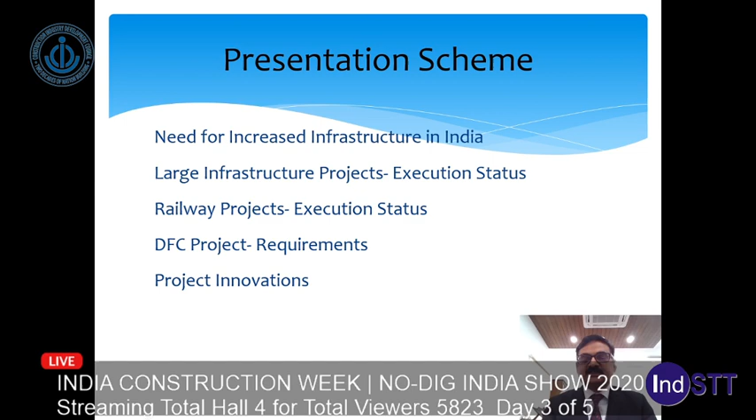This is the presentation scheme. First, what is the need of increased infrastructure in India. Then, how large infrastructure projects are executed in developed countries, focusing mainly on railway projects and their execution status. With this background, I'll focus on how DFC projects face the challenges of execution and what project innovations are being adopted in DFCCIL projects.

As we all know, the Indian economy is aspiring to become a 5 trillion US dollar economy by 2024-25. For that, the country needs to spend about 1.4 trillion US dollars on infrastructure. This spending will be done through different projects to bring these infrastructure projects into reality.

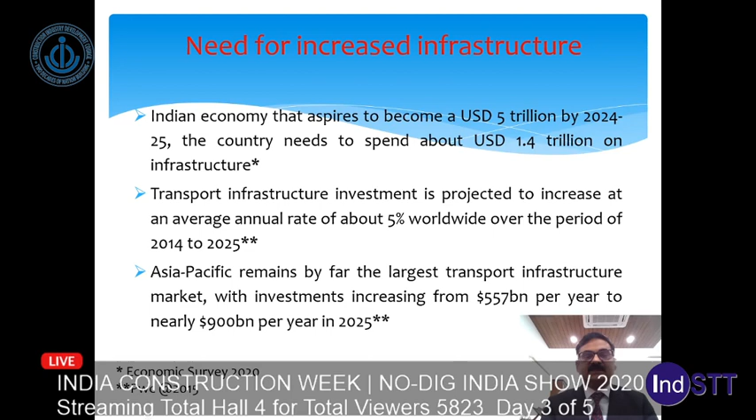What has been our experience with execution of large infrastructure projects? A study in 20 developed countries suggested that about 90% of projects have cost overruns. Another study of 44 urban rail projects suggested that average cost overrun is about 45%, and about one-fourth of projects have cost overruns of more than 60%.

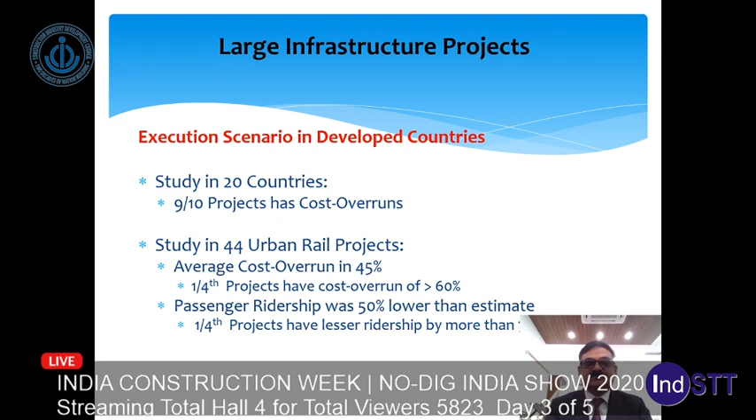In India, the situation is almost similar, especially for railway projects. As per an audit report of 2015, there has been delay in completion of projects resulting in cost overrun of over 1 lakh crores. During a period of 5 years, about 202 projects were added to the existing list, but only 67 were completed during this period, showing a huge pending list of projects waiting for completion.

How is that happening? One reason is the underutilization of funds or disproportionate allotment of funds, or ignoring the fund constraints.

In this India Construction Week presentation, I will focus mainly on the execution strategies which we as engineers can focus on to expedite project delivery and to meet the challenge of developing the huge infrastructure which the country is demanding.

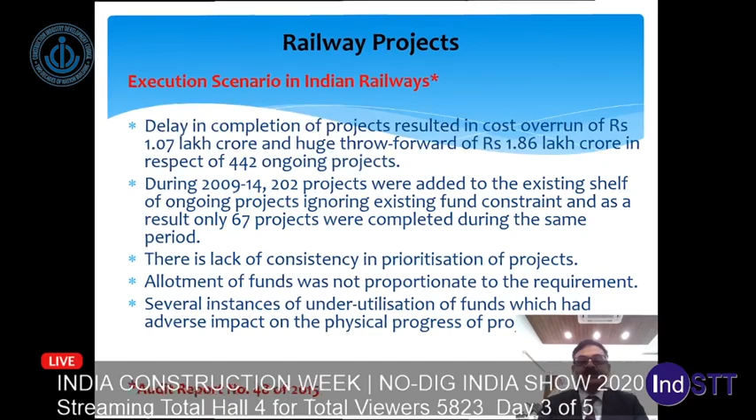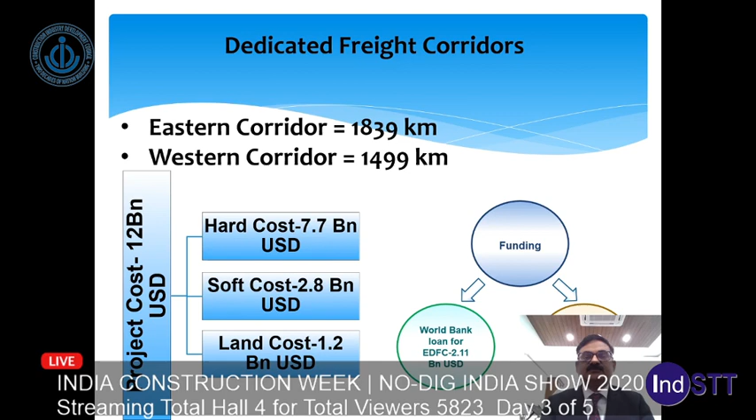With this background of very poor project execution statistics, when the Ministry of Railway took up the project of dedicated freight corridors costing over 82,000 crore rupees, there was a lot of consideration on what should be done to execute a project of such a large magnitude.

The magnitude of this project can be understood by these figures: the hinterland of DFC projects caters to 480 million population and a huge catchment area.

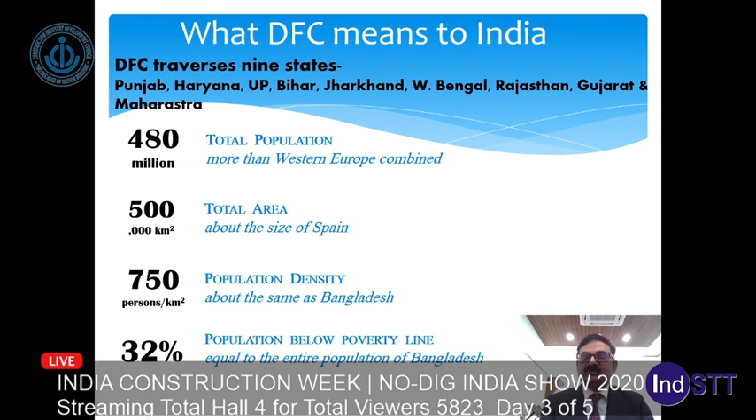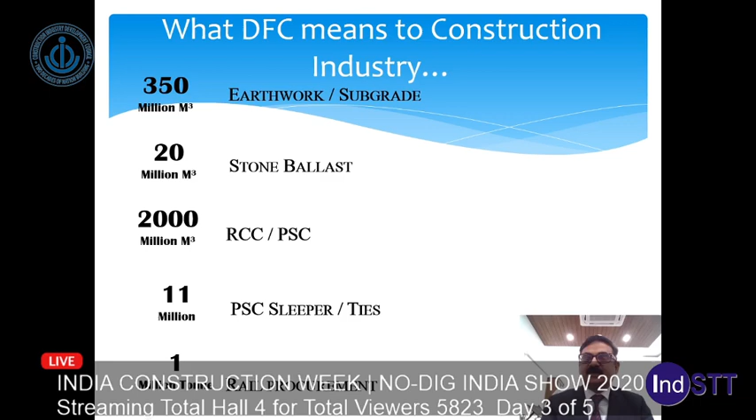This project requires construction of over 7,000 bridges, 50 rail-over-rail flyovers, over 1,000 road over and road under bridges. It will use over 1 million tons of structural steel and land acquisition of about 2,800 square kilometers.

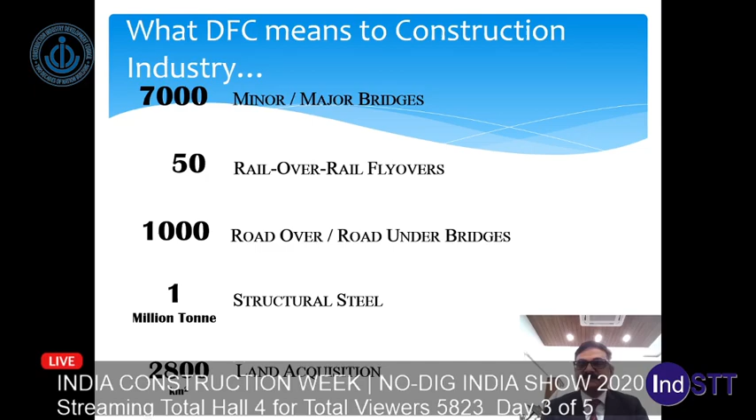In electrical, signaling and telecom too, the requirements for these projects are very huge, with large requirements of contact and catenary wire, aluminum conductors, insulators, structural steels, OFC and other telecom exchanges.

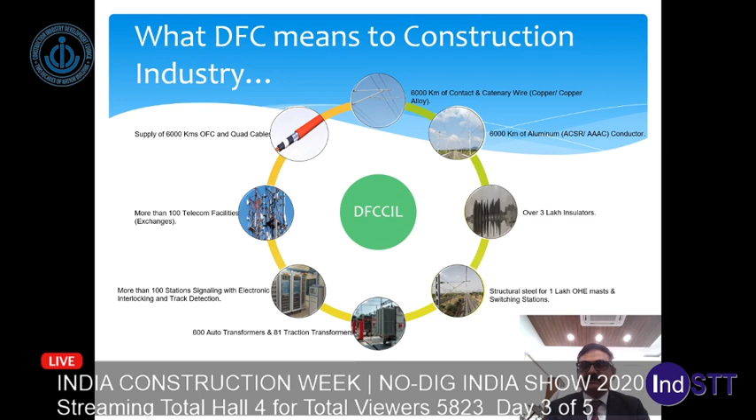Believe me, these are really very large figures, and to execute and put these different activities into reality, there has to be a different strategy as compared to what had been used in the past.

To meet the challenges of execution of this project, a different contracting strategy was adopted, at par with other developed countries where large infrastructure projects have been done successfully. But here I'll focus more on the execution strategies adopted in this project.

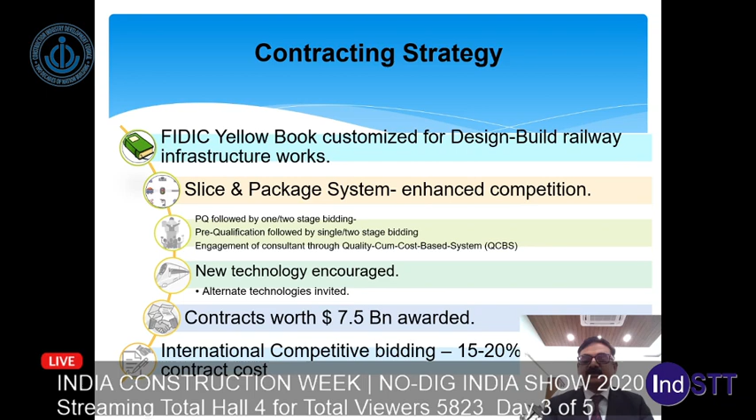First, in this project the complete elimination of level crossings was envisaged, meaning there will be no surface crossing of road with the freight corridor tracks. This demanded construction of about 562 road under bridges and 296 road over bridges, and different innovative schemes were used to execute these works.

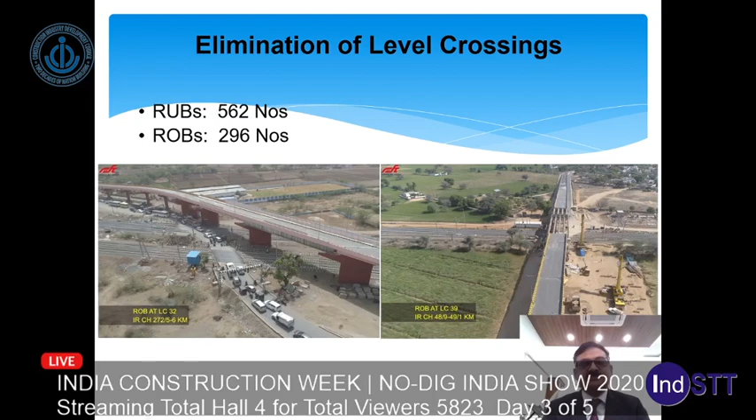Another feature adopted was use of grade separated railway track crossings. Wherever this freight corridor track crosses another track, it was made grade separated to avoid time consumption in surface crossing of two trains.

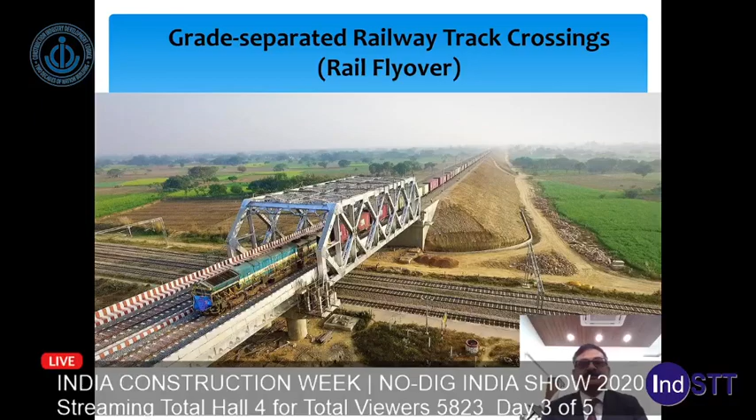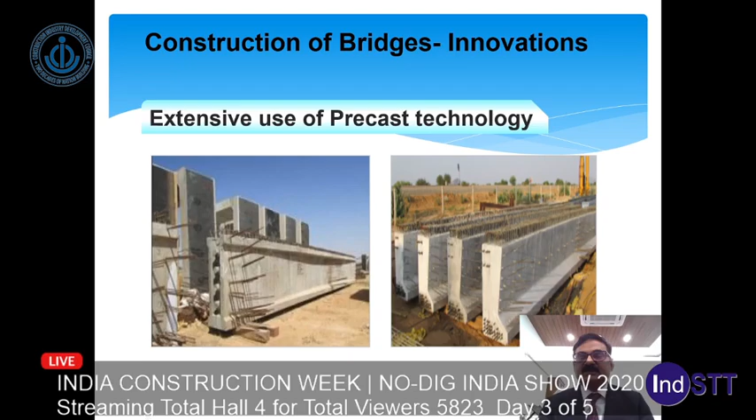In the construction of bridges, extensive use of precast technology is being used to expedite construction. Standardized bridge designs are being used to replicate designs at several places, which reduces the requirement of formworks and design inputs.

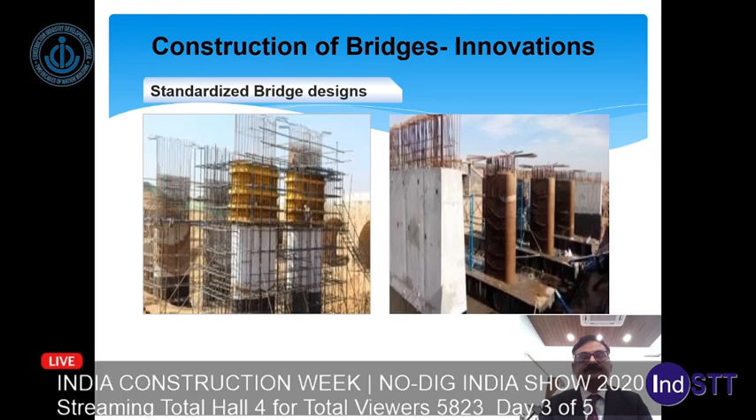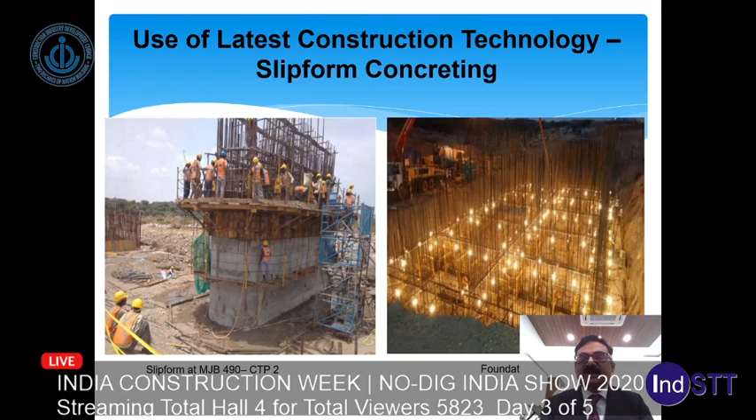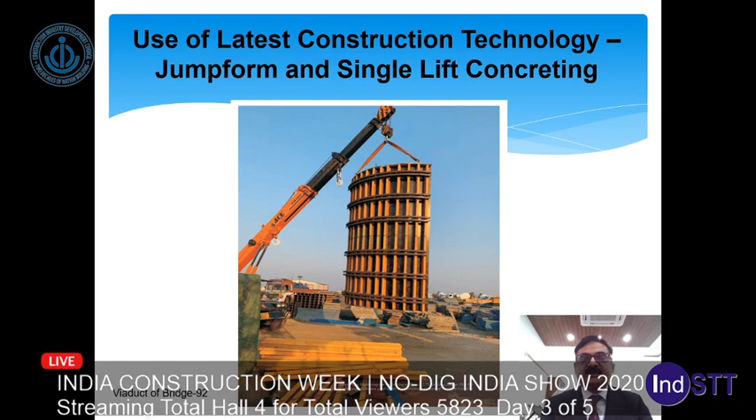Use of slip form concreting is used to expedite construction, improve quality, and achieve faster construction. Jump form concreting and single lift concreting is being adopted to expedite construction; here, single lift concreting is being done on a bridge abutment. Extensive use of machineries has been done, with adequate safety measures especially for workers.

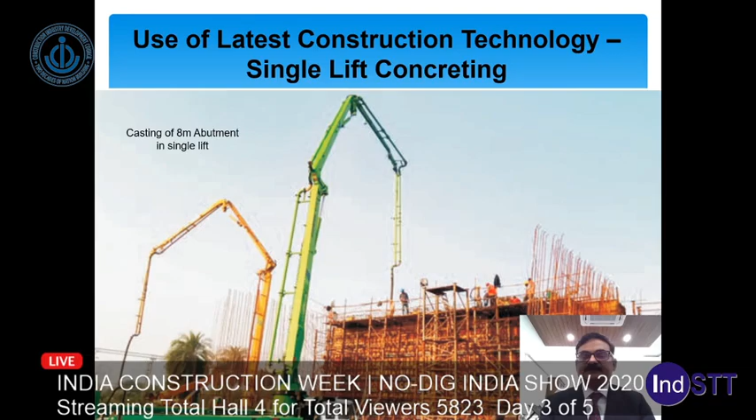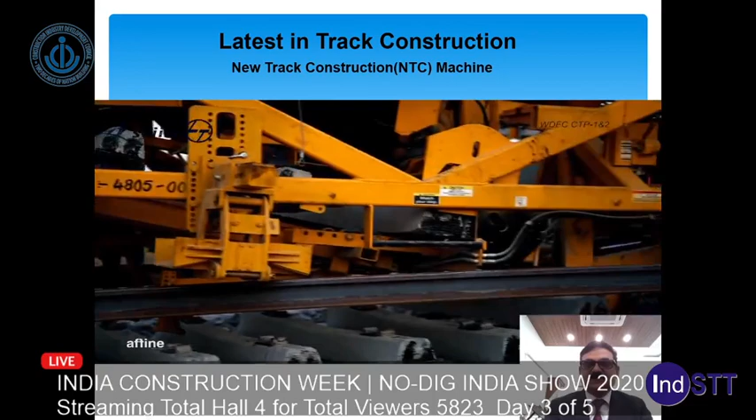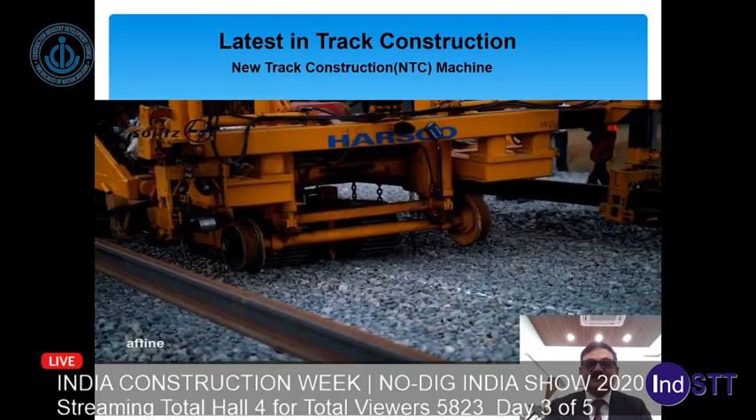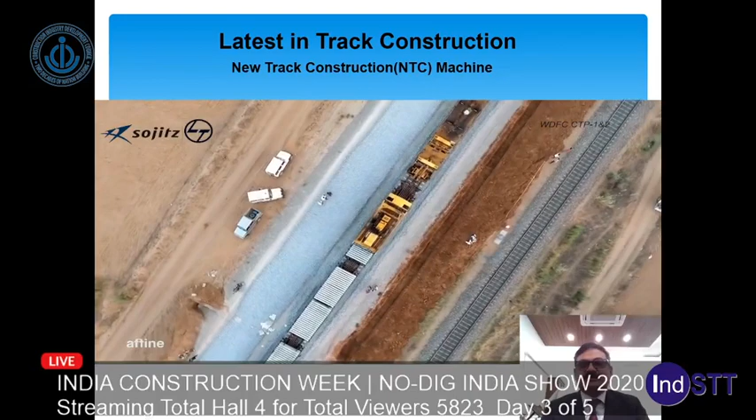In track construction too, use of latest machines has been done in this project. Here you can see a new track construction machine imported from USA doing the track laying work, with sleepers placed at equal spacing and rails mounted on them. This mechanized construction ensures very good track quality and faster construction.

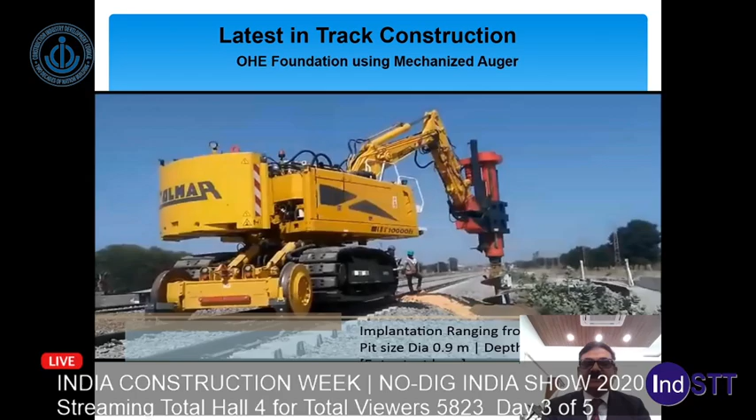In electrification work too, extensive use of latest machineries is being done, including machines for placement of OHE mast using mast grabbers in a mechanized manner.

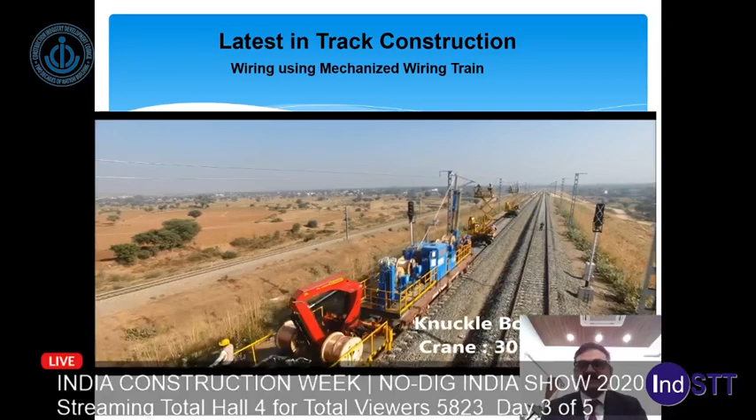For wiring of OHE, OHE wiring trains are being used, which expedites the wiring for electrification work.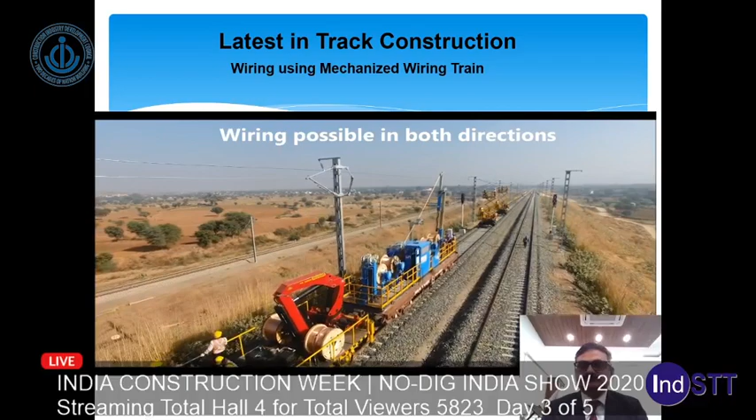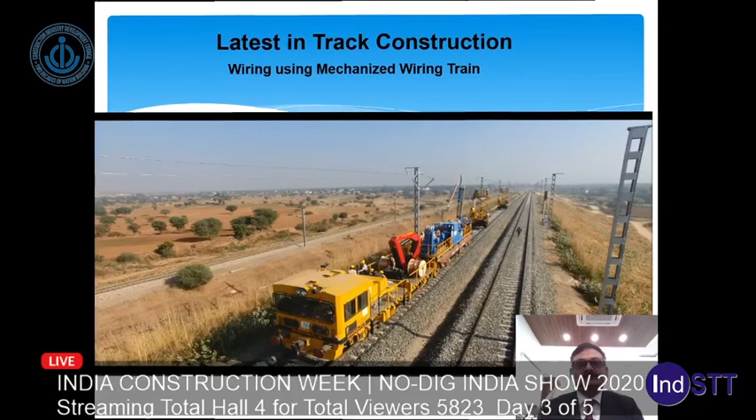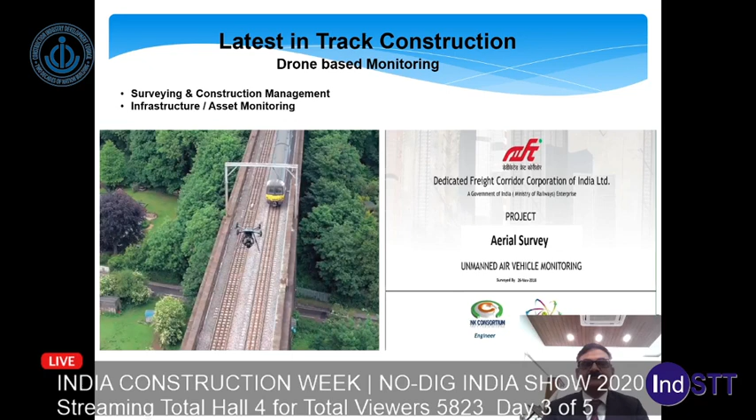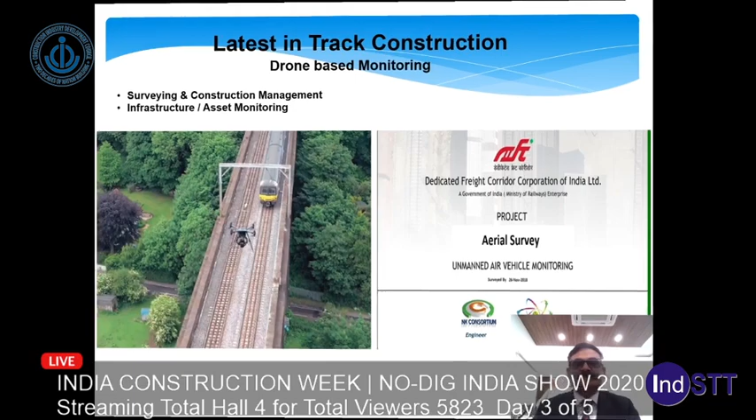In project monitoring, use of drone technology is being done for getting real-time and actual site details, and GIS web-based progress monitoring is being done for authentic and accurate site information.

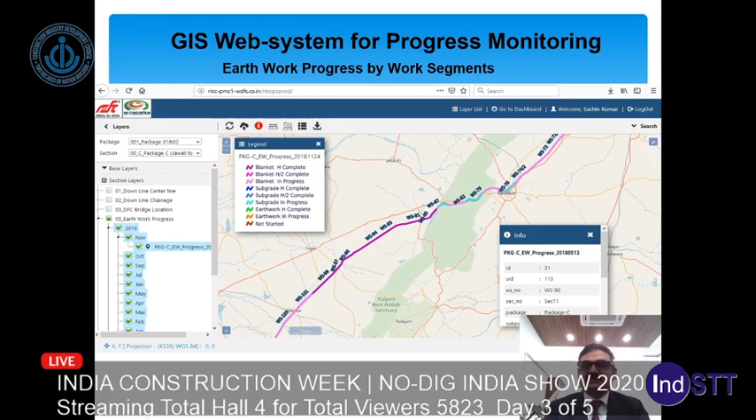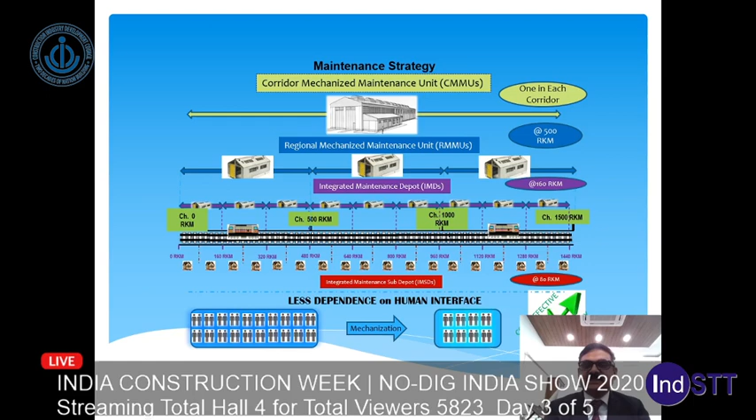In maintenance strategy too, extensive use of mechanized maintenance and less dependence on human interface is being planned to ensure safety and reliability.